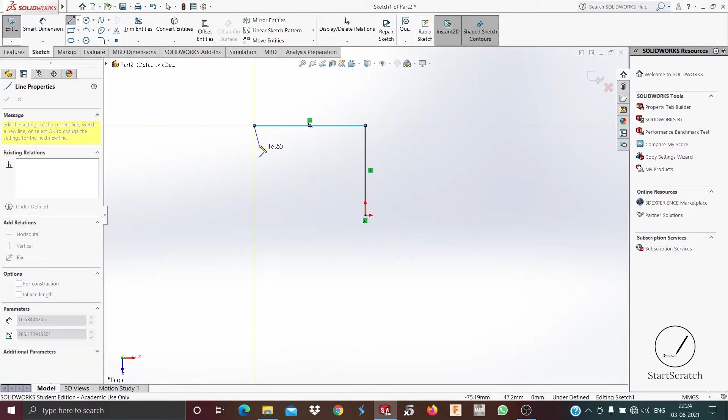We start from the origin and draw a vertical line, then a horizontal line. Now if you go away from the line and come back on it, you see two concentric circles, which means you can draw an arc from that point. You can drop your arc anywhere you want. I'll drop it here, then draw a few more lines, and another arc.

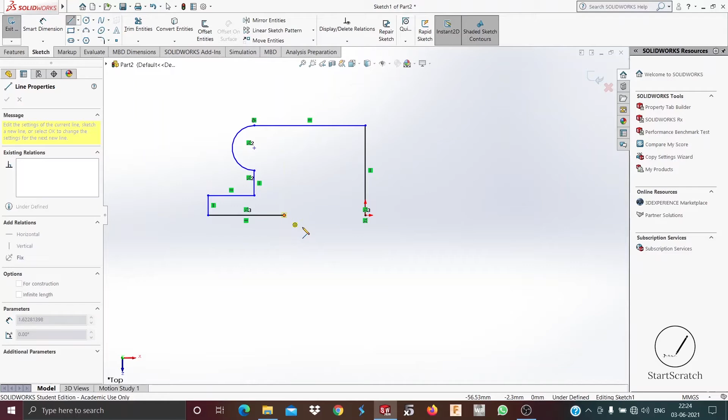Now, as you see, there are a few black lines here, this one and this one, and the other lines are blue. The black ones are the defined lines, because this touches the origin here, so it is defined, and this line is in line with this line, so they are defined here through constraints with the origin.

Now to define this sketch, we start with dimensioning it or putting it in constraint, but in this video we'll dimension it. To dimension, we choose a tool called Smart Dimension, which you can see.

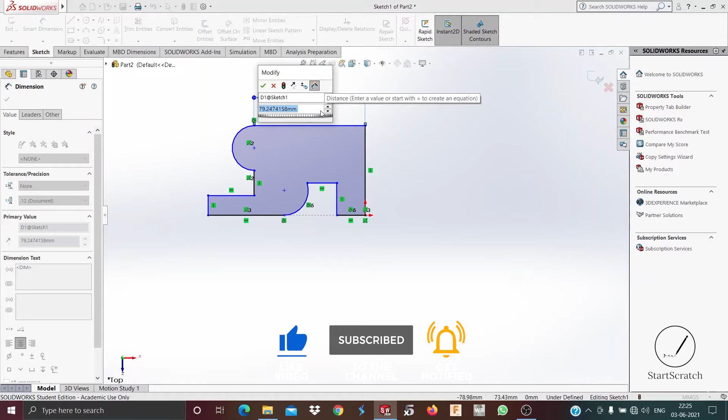Now we click on Smart Dimension and start dimensioning the lines. As you can see, there's a dimension given here as 79.24 millimeters. You can put whatever length you want, but in doing problems, you put in the length given to you, or whatever parameters you've set. For now, I'll just put it as 80 millimeters.

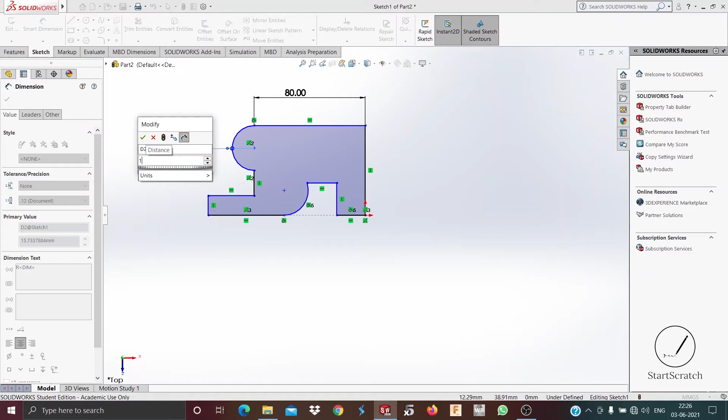Now you can also dimension this arc. Just click on it, and click again, and now there's an option for you to feed in the radius length. I'll put it as 16 millimeters.

Now you select this line and put a dimension to it. Now you can see this bar here, right? This is a rolling bar. You can move it backwards or forwards to increase the length, and moving backward decreases the length. See here, I'll just drop it somewhere, and by this arrow also you can increase or decrease your length. For now, I'll just put it at 13 millimeters.

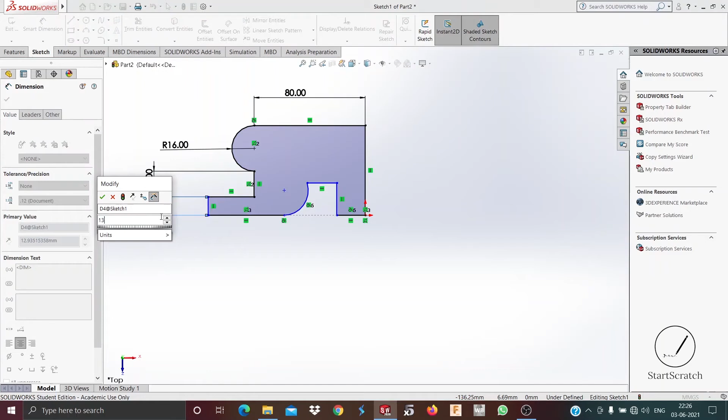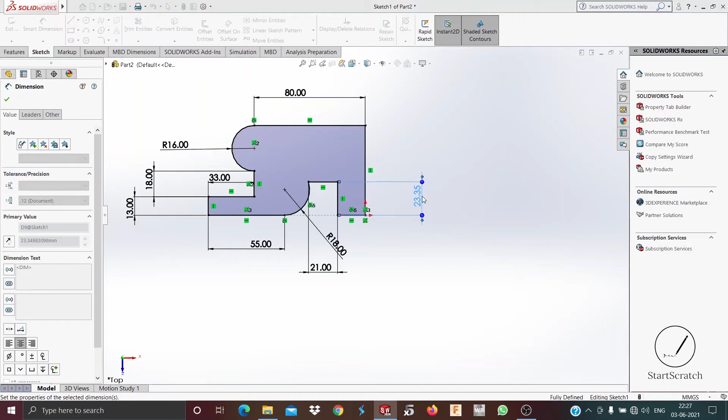Now you define your lines. I'm just putting some approximate values. See, as the lines get defined, the colors change to black. Now the whole sketch turns black, which means it's fully defined.

You can also see this in the bottom here. It says fully defined, which just tells you whether your sketch is underdefined or fully defined. Previously, it would have been written as underdefined there.

Now there's another way to define your sketch. For that, first I'll delete these few dimensions to make the sketch underdefined. See, now the sketch has been underdefined.

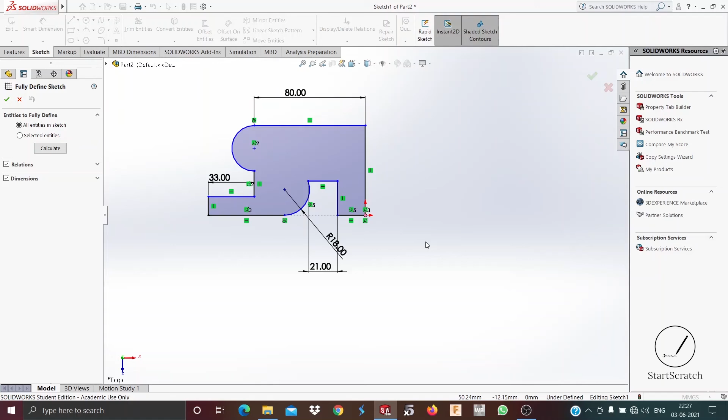Now I go to Display/Delete Relations, and then I choose Fully Define Sketch. Now you choose all entities in the sketch because you want to fully define your whole sketch, and you press calculate. So you can see here that your whole sketch has been defined by SolidWorks itself.

Actually, this way is not usually preferred or followed because it puts in approximate values according to the software. But the actual length should totally be based on the problem you are doing, the values you have been provided, or whatever you have chosen.